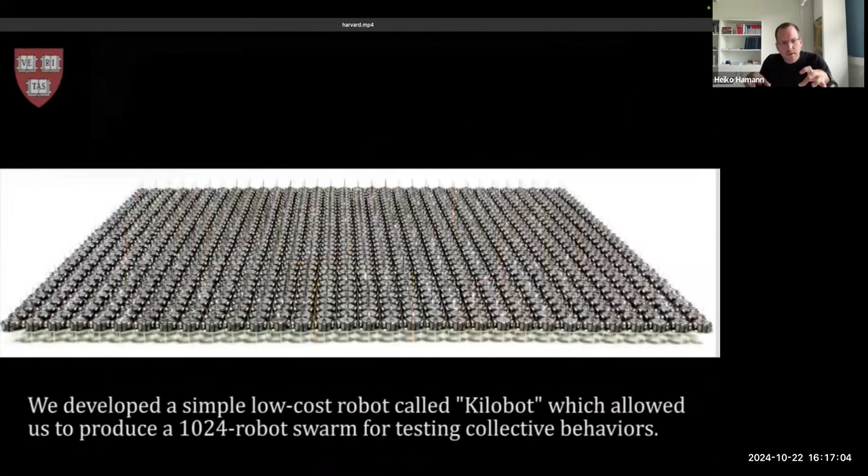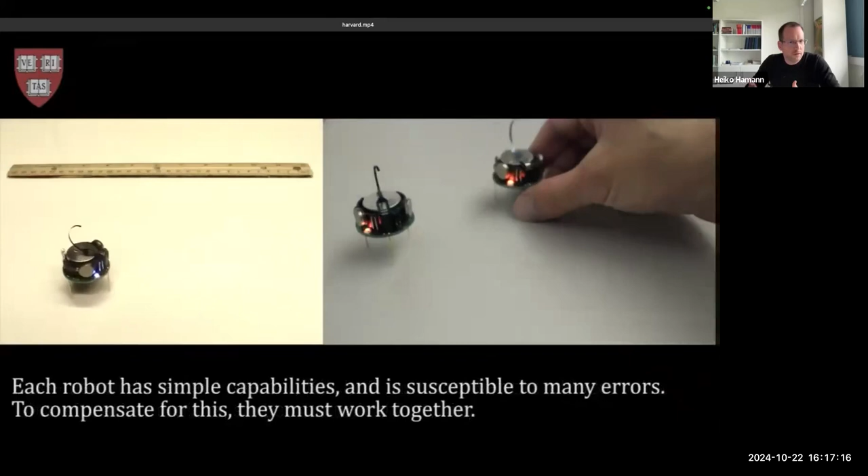They just aggregate, they stop next to each other, and they're asked to form a user-defined shape. They do that in a fully self-organized, decentralized way. We will later touch a bit more on what that really means. But there's no outside control telling the robots what to do in what moment, besides telling them in the beginning what kind of shape they're supposed to form.

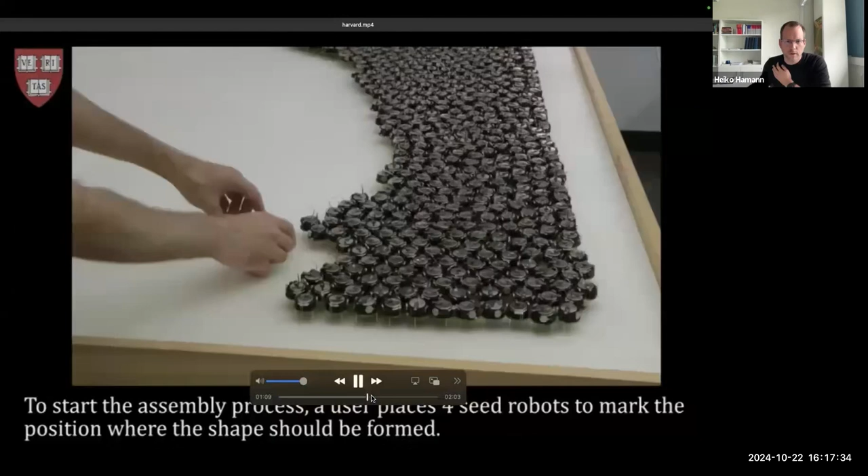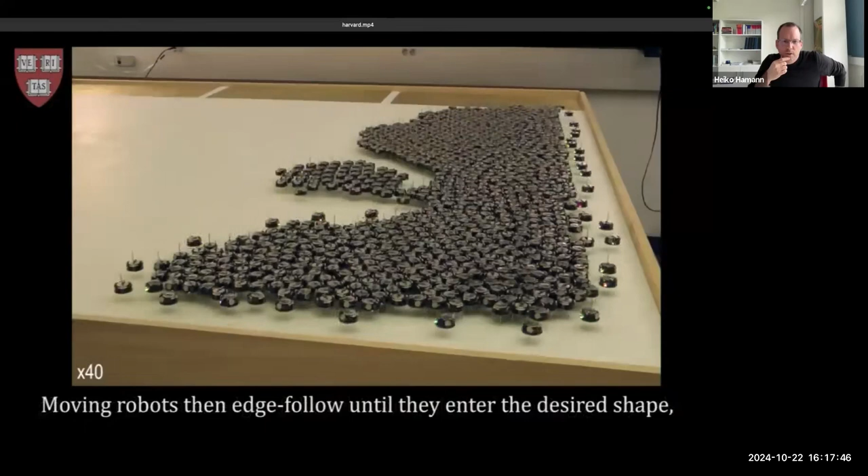So yeah, just more details. So this approach has some flaws because these robots have to line up, so this does not really scale too well. But you can tell from these tiny robots that they for sure don't have too many skills, and still they manage very slowly, right? All these videos are sped up a lot. They manage to

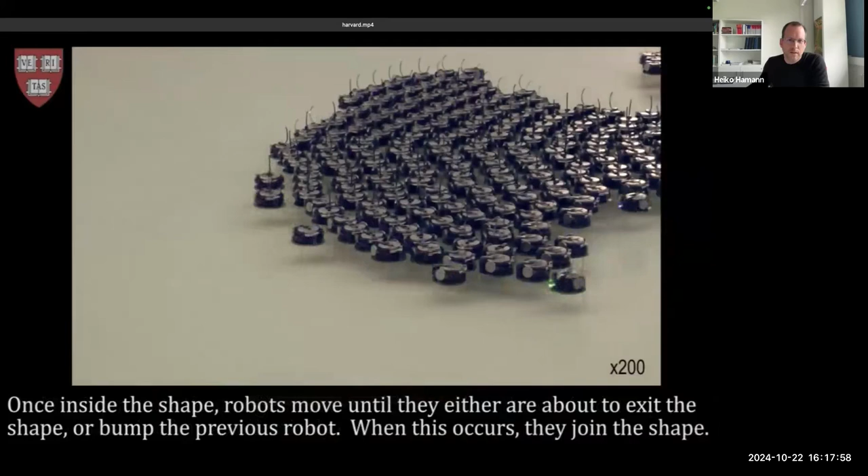aggregate and, well, they achieve self-assembly, doing self-assembly and forming all these different shapes. And these are experiments that take 12 hours. So imagine these poor PhD students sitting there next to it, trying to make sure everything works. So again, no details here. How does that really work?

So just as a teaser, but very important work back then, because before nobody thought it's actually feasible to have 1,000 robots in one room and then also to successfully control them. This is then from my own work. This is only 100 robots, but the same robot, the Kilobots.

This is a so-called collective decision-making scenario. This was in collaboration with the ULB, a university in Brussels, with Marco Dorigo and Gabriele Valentini. And the robots are supposed to check out these two sites. So there's the red site on the right-hand side and the blue site, hard to see, on the left-hand side.

They need to go there to explore a quality. How good is that site? And then try to convince the other swarm members, like, hey, red is great, go for red. And in a collective decision-making process, they're supposed to agree on what's really the better option. And actually here, the red quality is said to be twice as good as the blue.

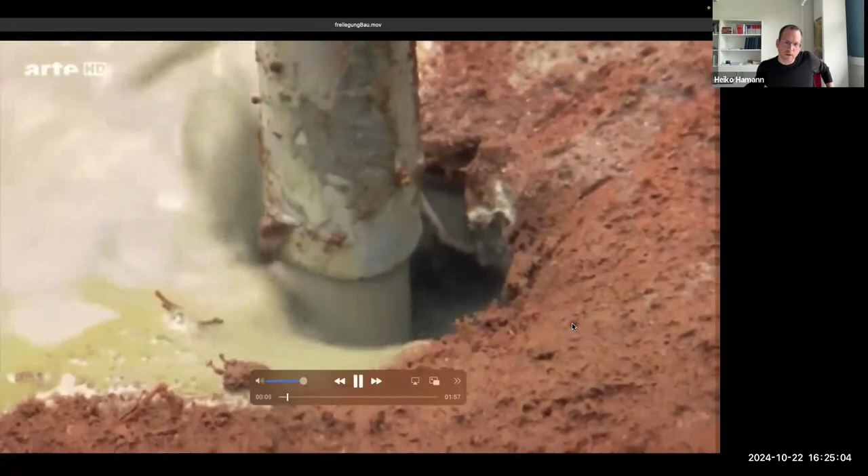And these people pour some concrete. Das Experiment erfordert eine erstaunliche Menge Zement.

Usually I turn off the sound. I don't know how to do that here.

But they pour some concrete into the soil and then they dig something out. So now it's looking like archaeology. But you can maybe tell, okay, no, they actually killed a whole colony of ants. And it's gigantic, right? So this is an architecture they built. And maybe I stop it here, also to stop the sound. This is what ants build, obviously by themselves.

You have chambers, you have these tunnels, and how is this possible without a single ant in the whole colony drawing this blueprint of where to put what? So obviously this is an evolutionary effect: ants evolved such that only on their very local perception, with their tiny brains, they're still able together to build these complex architectures, right?

And that's my main pitch here. If they can do that, can we build that into our robots? So can we have very, very simple robots that still achieve awesome things once they work together, right? And then this would be our challenge, like challenge accepted, right? If the ants can do it, can we teach our robots to do that?

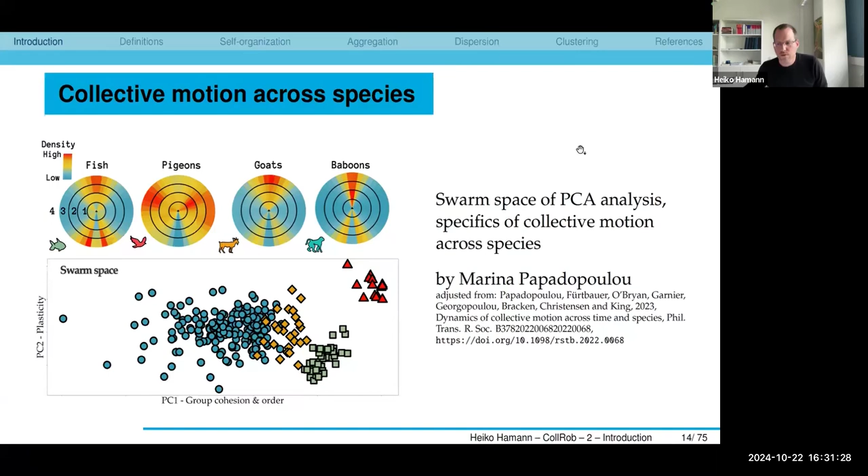So good for us, right? As engineers, we want to apply this. So there's general paradigms that we can maybe try to follow. And now a little bit more, we're working our way towards the terminology. So I've mentioned very often already the word swarm.

What is it really? It's interesting, once you open biological textbooks on collective behavior, they shy away a bit. They don't really want to define the noun swarm. They usually prefer to define what is swarming behavior. So they define a swarm via its behavior. And there they're also usually a bit narrow. They say, okay, swarm behavior is a form of aggregation. Makes sense, right? You want to put many organisms or many individuals close to each other. Otherwise, they cannot really interact.

And then this is also, of course, often in biology combined immediately with collective motion, because most animals need to move to search for food or to protect themselves from predators. So this is how they define it in biology.

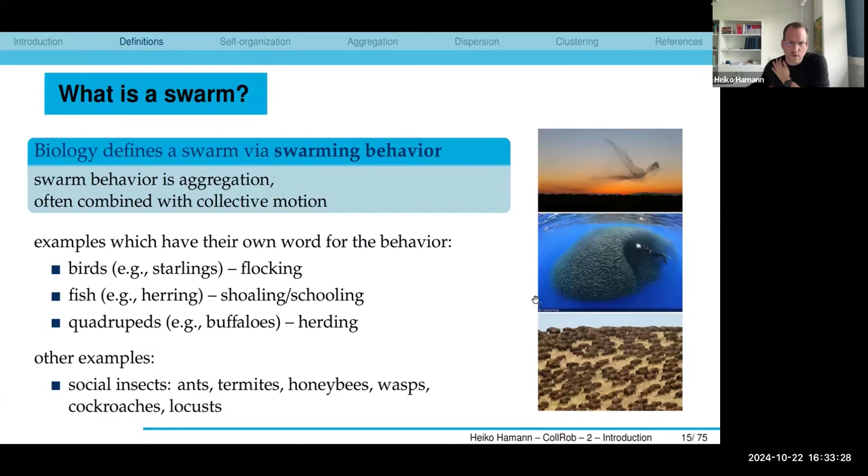In the English language, you also find that they have different words for different forms of collective motion. I have already mentioned flocking or schooling or herding, once you talk about quadrupeds. If you compare it to German, for example, we don't really have verbs for all these different behaviors. Just a curiosity. And I've mentioned already a couple of animals. There's also termites, of course, honeybees, not so much wasps, cockroaches, locusts. So many animals showing swarm behaviors from which we can learn, right?

And then this other kind of tricky, almost annoying question. Whenever I tell people I'm doing swarm robotics, at some point people want to know, okay, how many robots do you need to have a swarm? Turns out the question is easy to ask, but it's hard to answer. So here I'm just pointing back in time to a paper from 19 years ago by Beni. And he has a kind of involved answer. He says it should be not as large as to be dealt with by statistical averages and not as small as to be dealt with as a few-body problem.

Now I would love to ask you who's doing physics and what do you think is a few-body problem? But just to save a little bit of time, I will skip this interaction here. There's the famous three-body problem, right? So if you do Newtonian mechanics and you try to predict three masses being exposed to gravity, and you try to predict where they will be after some delta t, in 5 minutes, in 5 years.

This turns out to be mathematically already very difficult. And I think that's what he's pointing to here. And then kind of random numbers pop up, right? So he says, okay, maybe we need 100 to get away from the magnitude of the difficult physics of 3. And then 10 to the power of 23. Well, this is a huge number, right? So where's that coming from?

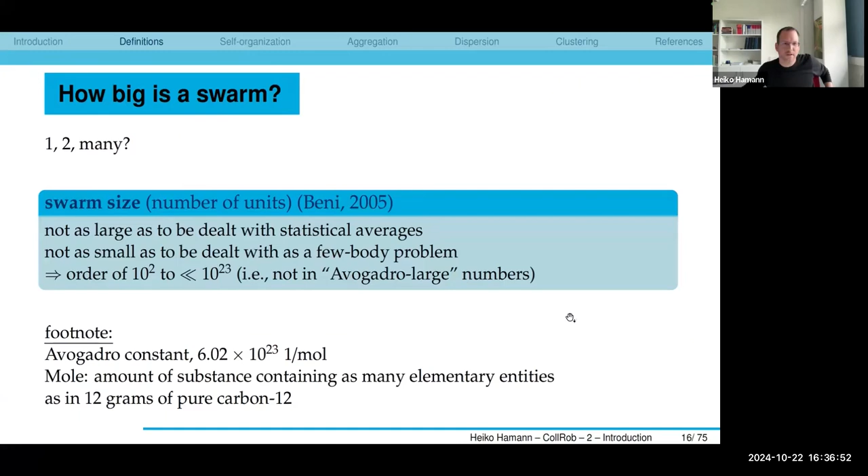But now these robots initiate an actual self-assembly. So not like these kilobots that you saw before that just stop next to each other. These robots actually attach to each other physically with this gripper by gripping the ring of the other robot. Whenever you do something like docking or connecting autonomous entities in engineering, it's always super difficult. Even after, I don't know, 100 years of doing that, we still struggle to implement good, reliable, robust docking. So apologies for this taking so long.

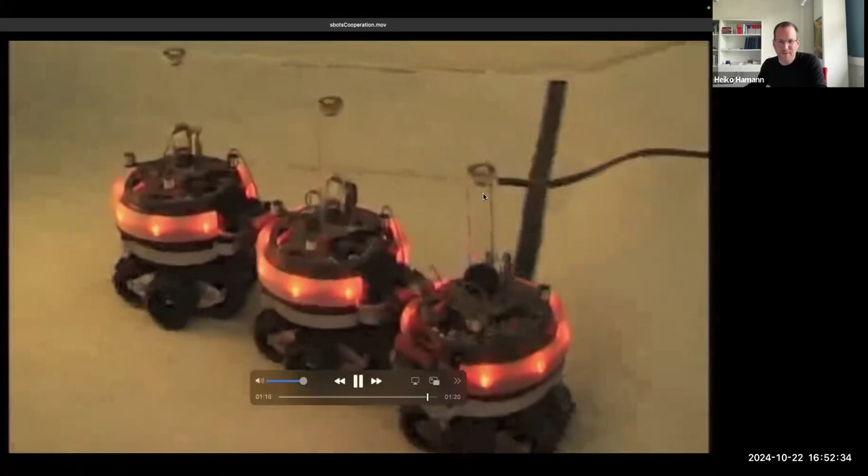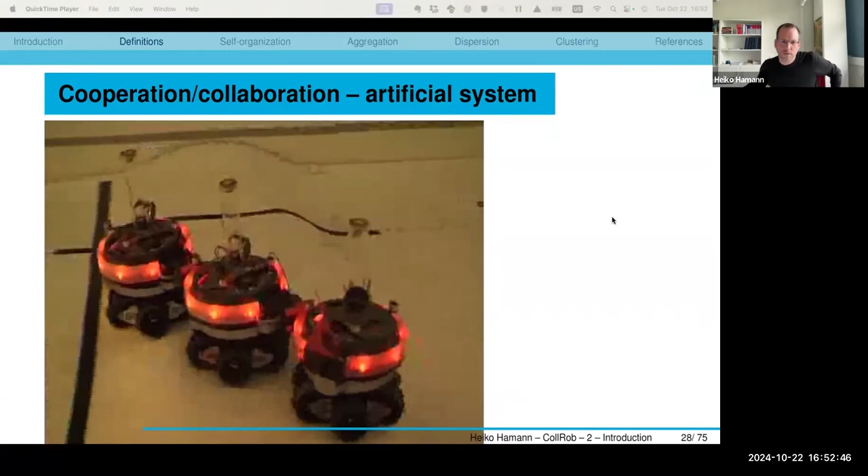And then once they figure, now we are attached to each other, together they can actually get over this not so huge hill. So this is roughly the idea, right? Make them work together and then achieve things that are maybe simple for bigger robots. But again, you have all these other additional advantages of having many of them.

And there's actually a whole philosophy behind that. If you read Watzlawick, you learn that one cannot not communicate. Think of this old couple, they have been married for 50 years. Do they talk to each other during breakfast? Not really, but still they understand each other, right? So this is what we try to implement in the swarm, I guess, that without explicit communication, you can make them coordinate themselves just by sensing, basically.

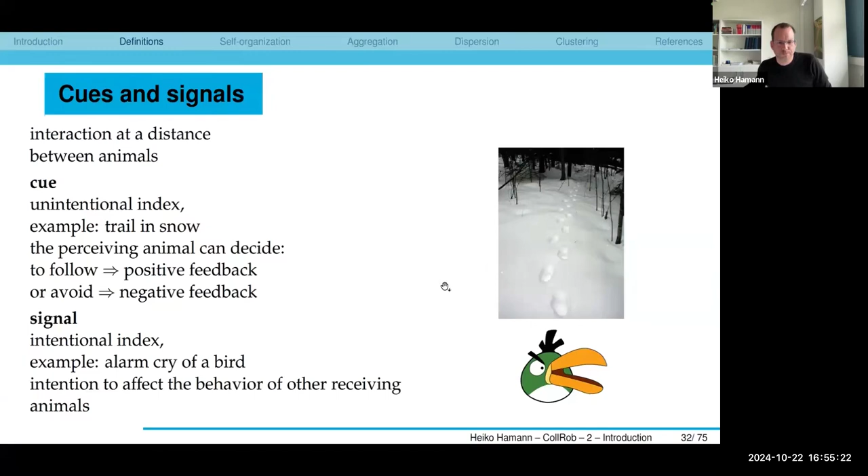And in contrast, explicit communication would be this intentional index, where, for example, the alarm cry of a bird is probably intended. Again, you can ask, is this bird really super consciously doing that? But that would be the idea of the more standard direct communication. And we often make use of cue-based communication, also via the environment, right? This was part of the definition before. And then we call that stigmergy.

This is communicating by way of the environment. And the classical example would be pheromone trails in ants. So they lay pheromones, and then an ant arriving later can use these to follow, and this is how a trail can form.

It doesn't need to be pheromones. You can do any change to the environment, like moving a chair or leaving some other material behind you, and then this already counts as stigmergy. It's mostly like a message to someone who will arrive later at the same spot, right? Also a potentially very powerful method.

Sorry, yeah, I said I want to be relatively quick, so I move on.

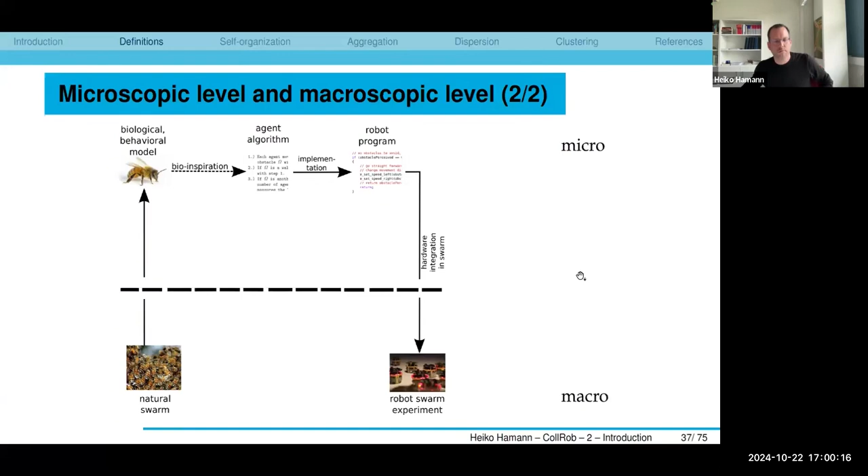And whenever you cross this border between macro and micro, so switching these languages, right? Speaking of the whole swarm, speaking of what a single robot can understand, this is always making some trouble, right? You should always expect some difficulties in transitioning from one level to the other. We also see that in our mathematical models. So I could even point you to a mathematical problem that actually also indicates this challenge.

And then, yeah, we should talk about self-organization for sure. So this is originally from physics, where we observe sometimes global order from local interactions, sometimes also dubbed order from noise. We're talking about, in the most general way, spatio-temporal structures. If you have a system where you keep adding energy, you can observe that.

And we define it by these 4 properties. So you need positive and negative feedback. You need fluctuations. Multiple interactions should be very clear. And then the 4th one is kind of difficult, maybe sometimes to grasp: a balance of exploitation and exploration.

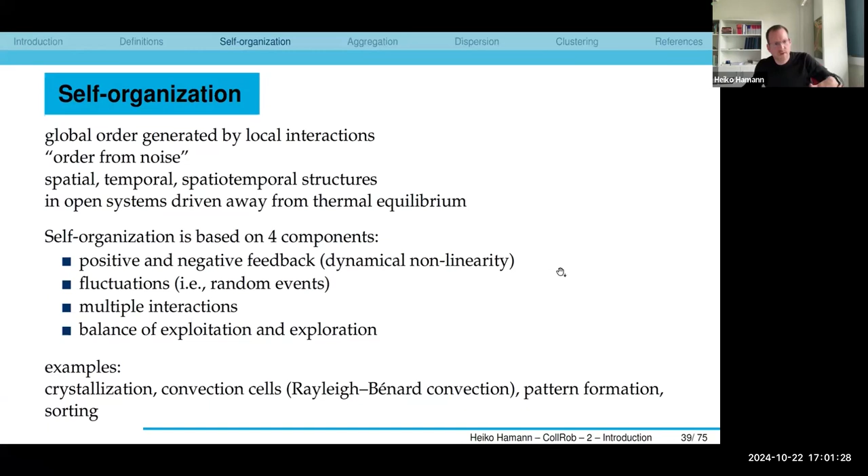And coming from physics, right? So typical examples would be something like crystallization. And this is what people then try to use as a concept to understand first biological systems, and then later we adapted it to robot systems.

So positive feedback is, for example, something like this, a market bubble, right? Real quick. You have prices going up, more investors come in, more money is added to the system, prices go even further up. This will always, on this planet, end at some time, right? The bubble will explode at some point and everything breaks down. But in a purely positive feedback, initial fluctuations, like whatever started the process, will be reinforced.

Negative feedback, you might easily understand. So for example, in control theory, it would be this mechanism: whenever you have a deviation, it's working against it and brings you back to an equilibrium. I'm trying to be fast again, but I think it's something you can understand really quick.

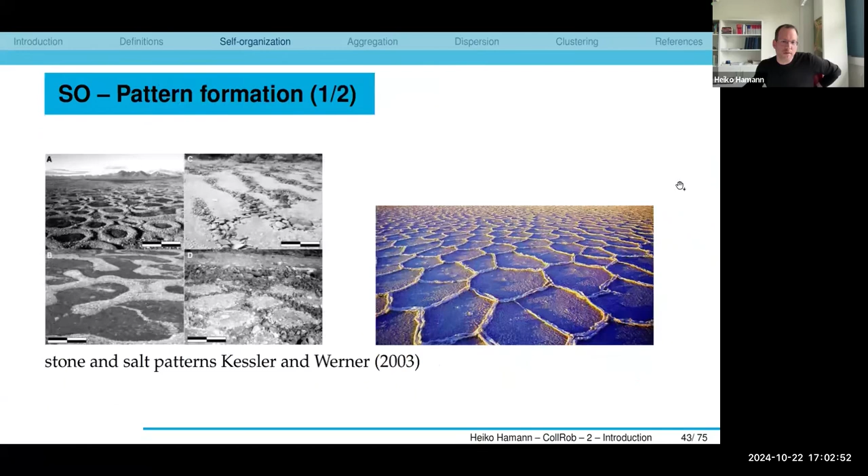And then in physics, a standard system mentioned would be Rayleigh-Bénard convection, for example. Again, I'm skipping a few things here. If you're interested, I guess you want to Google that. You have that in stone patterns, also in, I think, salt lakes. Also now we have climate change, so there's defrosting permafrost everywhere. Also there you see interesting self-organizing effects. Again, if you're interested, check it out yourself.

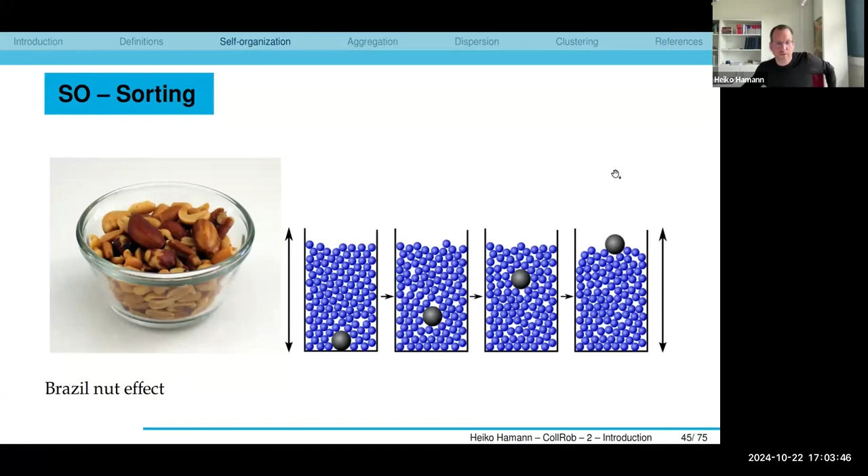This is maybe a bit more interesting. So if you ever got annoyed, why do you always have at the end in your muesli bag only the small nuts and dust? It's not because they intentionally put all the good stuff on top. This is actually a physical effect called the Brazil nut effect. If you shake a bag of muesli, then the big nuts move up against gravity. A fun thing to observe, I guess. And if we have time, we will get back to that in a minute.

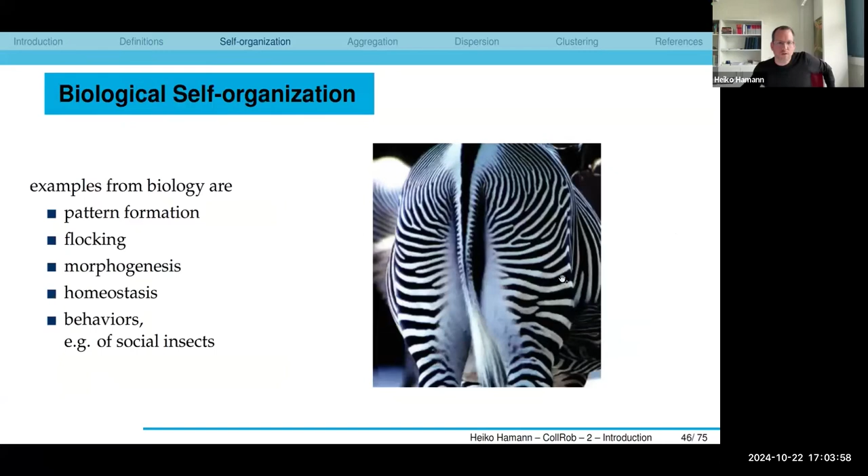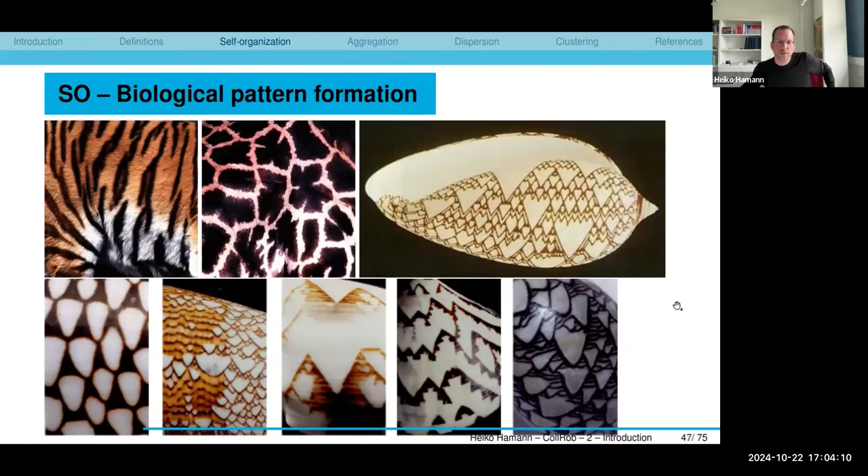Also, of course, in biology, you have these self-organizing effects everywhere, like in pattern formation on fur or skin. Of course, also in flocking. So this is seashells, tigers, giraffes. You get the idea. Flocking will for sure be treated later also. That's already speaking about behaviors that are also self-organizing. You can try to entertain yourself by trying to identify what's the positive feedback and what's the negative feedback in these systems.

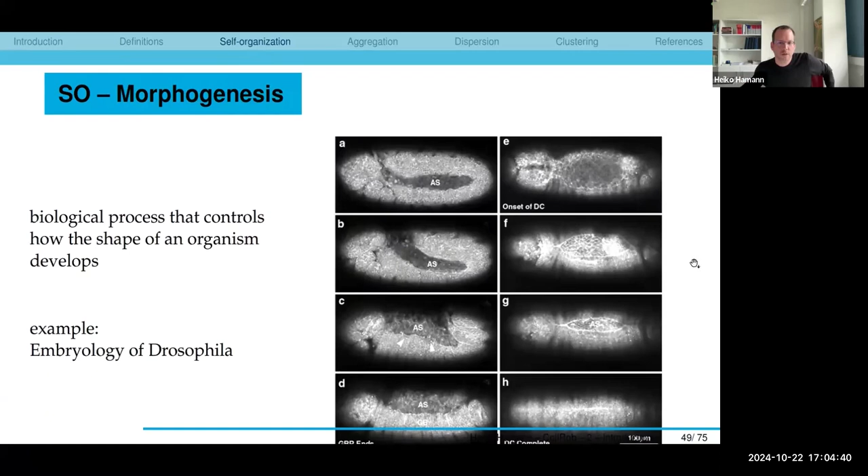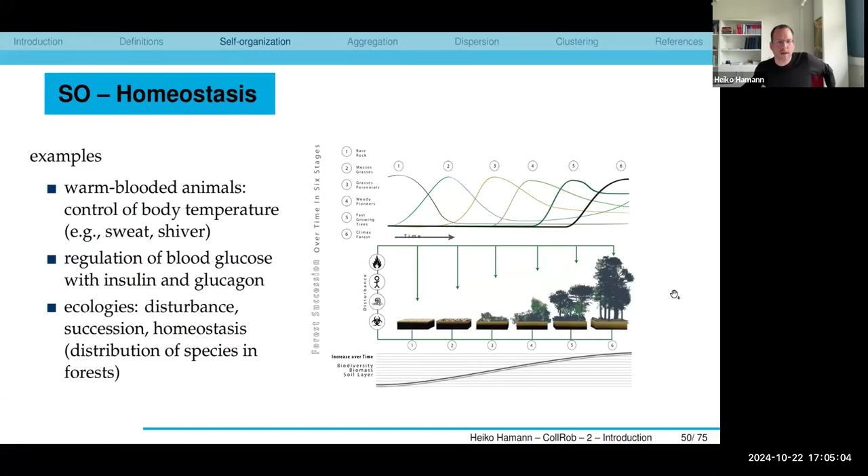Morphogenesis: if you look into embryology, you see that at work, these cells actually do move and they self-organize into patterns to form a working living organism. Homeostasis, for example, if you think of ecological systems like a forest, also there you have these feedback loops that stabilize the system, and then you bring in more and more different species and they support each other and so on. Again, I hope you get the idea.

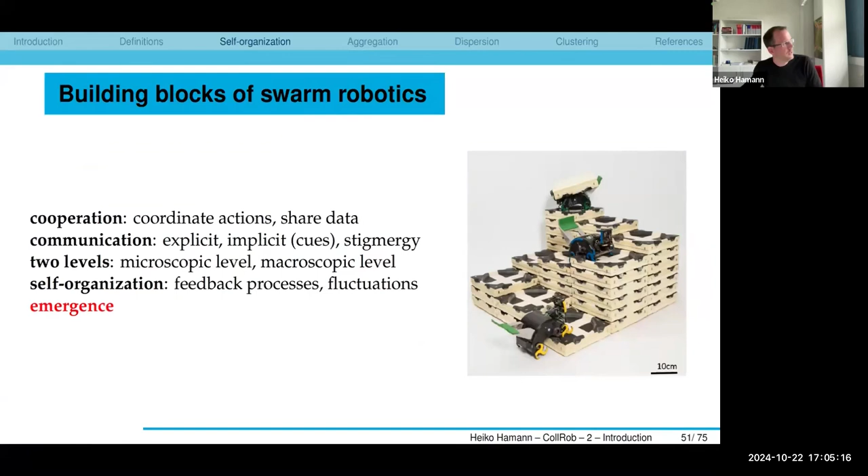And then this kind of sophisticated concept is emergence. We already had that in this definition before, right? And this is actually a concept of philosophical scale. So people say we observe emergent behaviors in swarms. And a real quick way of trying to understand what these people are talking about is think of these different states of going from solid to liquid to gas.

And a truly emergent effect would be if you have never seen a liquid in your life, and then for the first time you see something going through the phase transition from solid to liquid, that would be a truly emergent effect for you, right? Because you have no means of modeling or understanding that if you've never seen it before. And this is kind of the idea. So can you have completely new qualities in a system, usually by self-organizing effects?

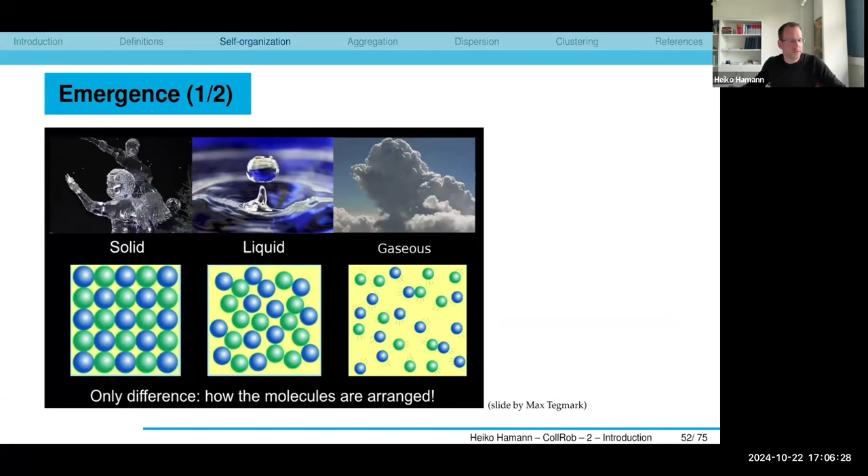So we can also quickly go through definitions. By now, you might know that I'm not a big fan of definitions, actually. So it's a kind of vague philosophical concept. It was quite popular in this community before. Nowadays, we're a bit more careful about it, as you can tell from what I'm saying. So new properties on an emerging higher level that cannot be described by whatever happened below. Also often Aristotle is quoted: the whole is greater than the sum of its parts.

People define it sometimes based on surprise. So you're surprised by seeing it the first time. I also just did that. Unpredictability. If you go to Dorigo, for example, again, the founder of the field, he defines it as: solutions to problems faced by, in this case, he refers to a colony, an ant colony, are emergent rather than predefined. So he even says whatever you see that's interesting is actually an emergent effect.

Long story short, I guess for us it's good news, right? So there's hope that you can construct or engineer something complex with a disproportionately small effort, right? That's the dream of every student. I mean, you work for an hour and you do something awesome, right? By emergence. But actually, it turns out this is really difficult to make work, to make it happen by working on the micro level, putting these little bits together.

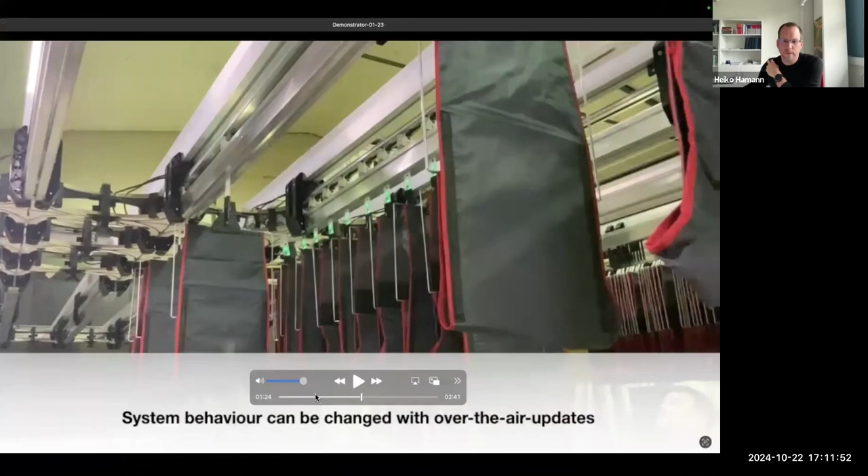So they thought, maybe we need to go decentralized or at least hybrid, right? Traditional engineering always goes centralized, with one central planner sending commands. They already sensed this paradigm change. Okay, let's go partially decentralized at least. Of course, this is a company and there are legal constraints, but this is legal to show. Just so that you also have seen some motion pictures.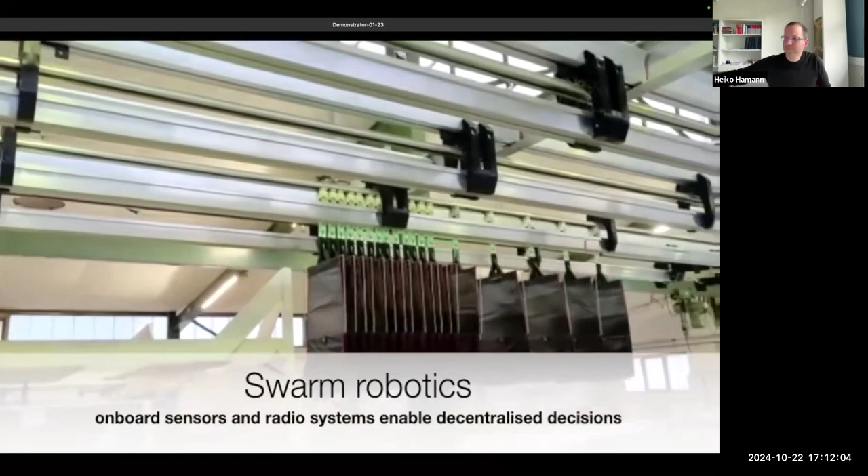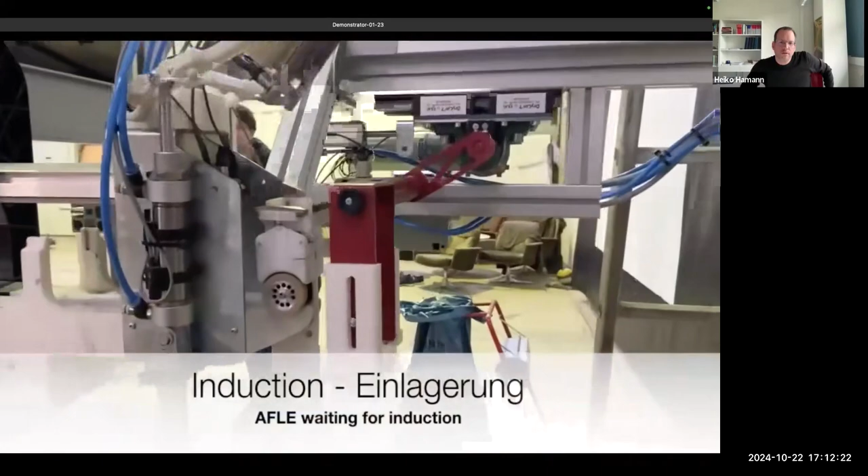Okay, fun music, all right. Not too much that you can see here, but they move around. We have these monorails on the ceiling. And the problem is organizing these robots at the crossings, right? There are even elevators. And I would say this is good German engineering, right?

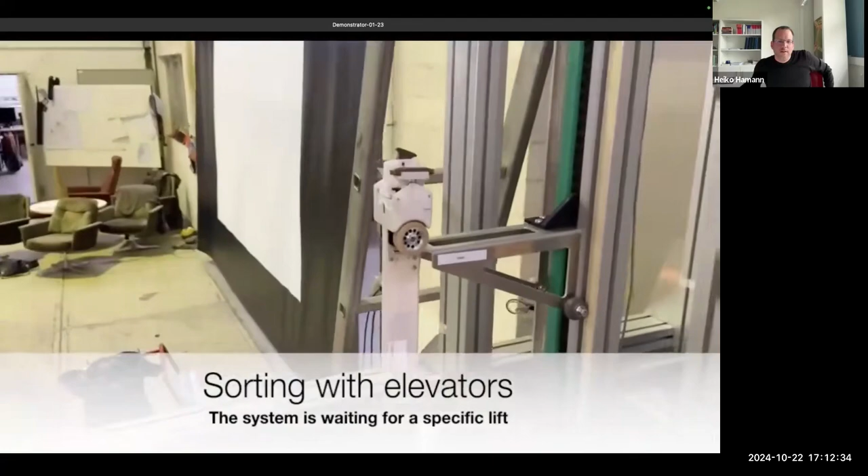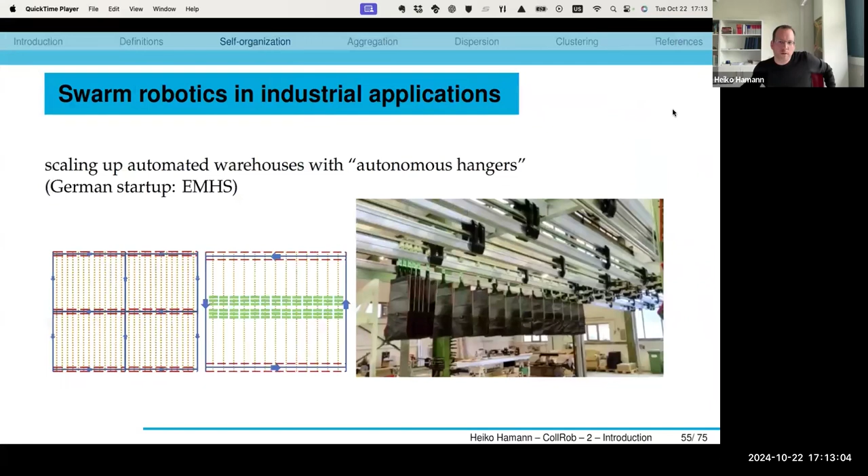And also they did some simulations, right? But they have to show their investors how does this scale? What if you have very many of these? How to organize them? How long does it take to get something in, to get something out? Yeah, I guess you get the idea, right? And this is happening now everywhere, and people are already making money with ideas from swarm robotics.

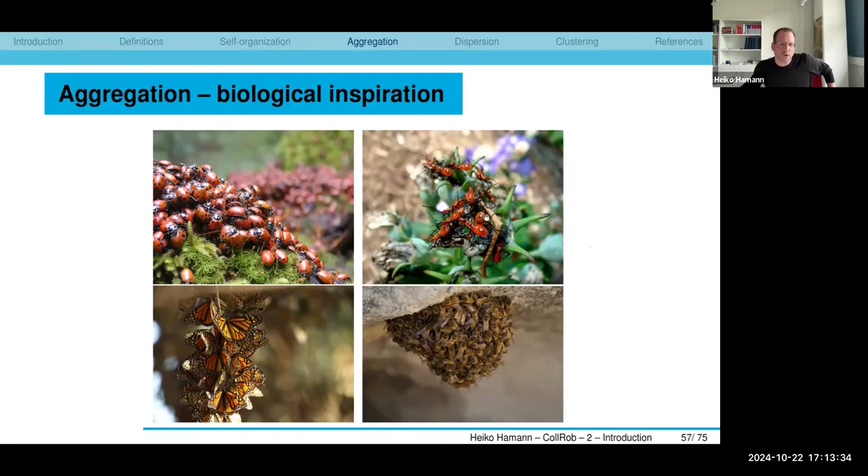Good. Now a little bit back to earth. So the more academic way of doing this, of course, would be can we go through different scenarios ordered by complexity? Basically asking what's the hello world program of swarm robotics, and you could argue it's aggregation. Here again showing the biological inspirations. And then if you ask robots to aggregate, what does it really mean?

Okay, you want them to move close to each other. Then you could say you don't care where they do that. So you ask them to aggregate at an unspecified spot. Or you say, no, it actually matters where they do that. So there might be an environmental feature that they first have to explore, find, agree on, and then aggregate there.

Now, a fun question would be, can you answer that? How would you program these robots to actually aggregate? And they have local perception only, right? So maybe you as a robot, you see someone close by, then you could just approach this guy. But then you have a cluster of 2 maybe, right? Maybe you're lucky and there's a third one, then you have 3.

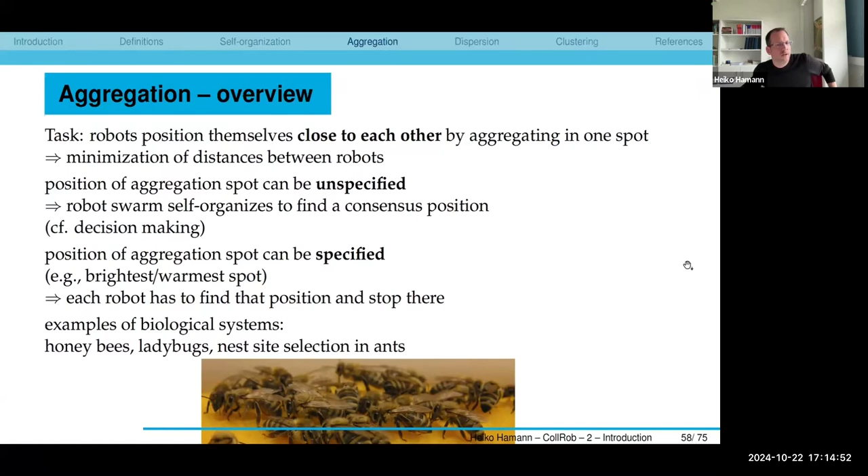But you don't know how big the swarm is. Where are the other ones, right? So when should you leave the cluster of 3? Because there might be a cluster of 5 somewhere, right? So as I've said, this is maybe the Hello World program, but this is already a bit non-trivial, right? So how do you make sure they all find each other and aggregate in one spot?

So there's different algorithms published in literature, like the BEECLUST algorithm, for example, if you want to look it up, where people give you ideas how to do that. Also, what if you have a dynamic environment and so on. So this is again the idea, right? Do that without global information.

So you also aggregate your study group or with your friends, but usually you use means of global communication, right? So you have a WhatsApp group, you have GPS, you have Google Maps. You can find each other easily, but what if you can't communicate longer than 5 meters away, and you don't have your standard pub where you meet, right? So how to implement that?

So here I'm just triggering some questions, right? I'm not giving you solutions, maybe except for this. Potential field methods could be something. I have to skip through this, and there's also approaches from control theory. Control theory at some point will always break in swarm robotics, but simple tasks sometimes can be solved also with control theory. Mohsen might disagree, I don't know. So I always have to convince these people from control theory that what they do is not always the solution.

So dispersion is then the next typical scenario. This is like the opposite, right? So try to position yourself as far as possible from other robots. You could just make them explode, right? So everybody chooses a random direction and moves forever in an infinite space; that might be possible.

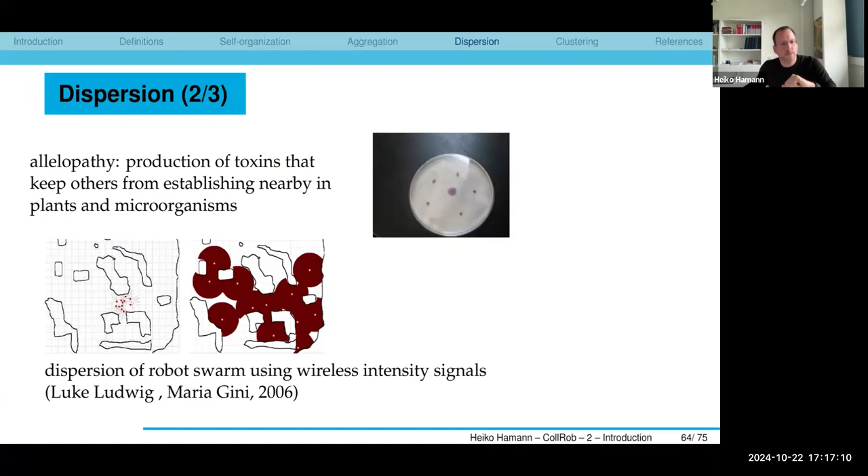Or maybe you also have another constraint saying, please move as far away from each other as possible, but keep connection, right? So that they stay as one connected component. Then, of course, it's immediately getting a bit more difficult. So there's, again, of course, many papers doing that. There's also biological systems that show you how it could possibly be done. So you could do it by signal strength and so on. But yeah, again, I hope you get the idea.

Clustering or sorting of objects. The biological example is here from ants. If you put live ants into a petri dish together with ant bodies, then what you see is an innate behavior in ants. They start to cluster these dead bodies, right? And again, here we don't know for sure how far such an ant can see, but they form clusters.

Now I could ask you, how would you implement that for a robot, right? So a robot picks up an object, and then it needs to decide where to drop it. But you can't navigate towards a cluster of objects because you might not be aware that it exists, right? And you might also not have a map or information where to go. So you have to move randomly. You have to behave differently whether you're currently carrying an object or not. How would you do that, right?

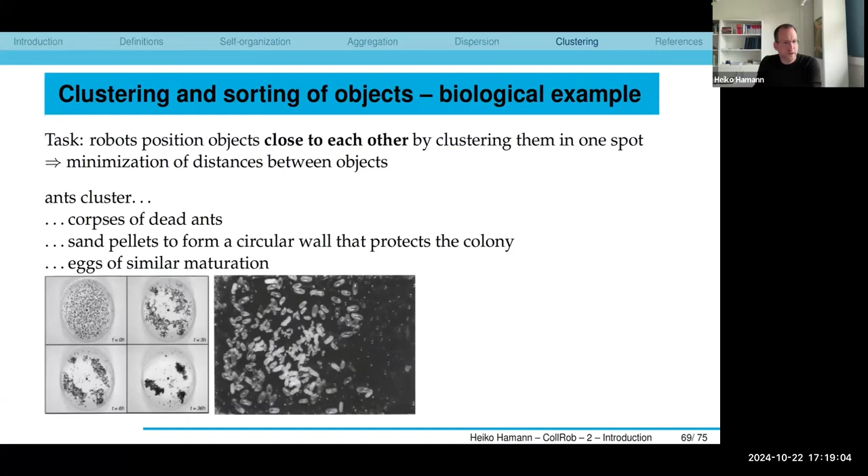So I can't give you much time to think about it. But here I give you one solution according to literature. So this is from the formerly mentioned book by Floreano and Mattiussi. You can do it based on probabilities. So if you have seen very few objects, but now you see one, then you should have a high probability of picking it up, right? So inversely proportional to the frequency of observations.

Why is that a good idea? Well, the last thing you want to do is pick something up that's already in a cluster, right? Unless it's a small cluster of objects. And then once you move this thing around, you want to have a probability to drop it. And the probability should be the higher, the more other objects you see around, right? So like the opposite concept. And this could already do the job, actually. Now you could think about, can I still improve that? Can I optimize that?

What if I want to sort? What if I have multiple objects? So there's red and blue objects, and I want to sort them. So blue with blue, red with red. Do I have to introduce another probability, or how to do that, right? So these are textbook academic scenarios and challenges, but they already communicate quite well what this is about, right? Like what your mind should be able to do, I guess, at the end of this course.